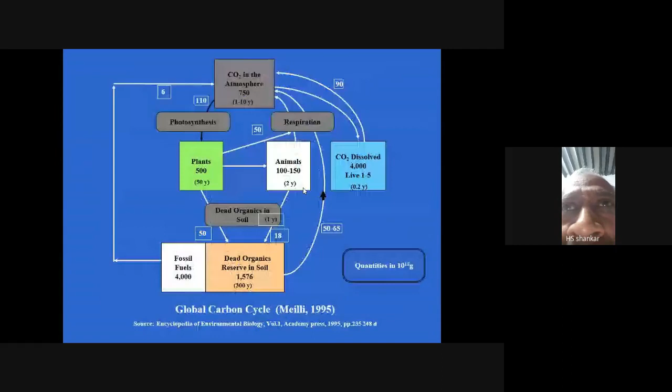So my fundamental submission is that we try and create, through the Jal Nigam funds, pumping of water from Ganga into Varuna and Assi.

Having said this, there are some points the Professor from INTACH has made about a lot of waste being thrown into the river. These are problems of corporation, well taken, and to the extent that we can resolve this by talking with them, whatever arrangements are required are being provided. I think all these are going on. A great amount of work is going on in Varanasi, and the quantity of waste going into these rivers has come down significantly over the years.

I'd like to briefly point out that we have a very interesting natural technology which has been working very well throughout this country. We have done close to about 200 million liters of work in different parts of the country, and many religious shrines like Pandharpur also have our plants working extremely well. What we create is a natural garden using a media which has the capacity to absorb, and the reaction rates required for these reactions to occur.

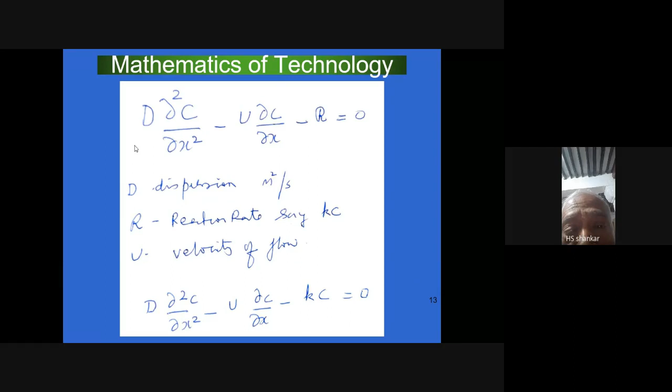Can you show one more picture of this, Vivek? No, backwards. Just backwards, please. Backwards. You showed just now. Yeah, thanks a lot.

What we have in this whole technology, we call it CAMUS SBT. CAMUS means Continuous Multi-Stage Advanced System of Soil Biotechnology. Essentially what we are using here is the biochemistry of soil, appropriately integrated, which we know how to do because we've been doing it for a number of years, where we have a bioreactor into which we put a media.

The media is what we locally use. Most of the time, the media we use in the Ganga Basin is only broken bricks, because it is abundant, easily available, and relatively cheap.

Once you put this material and pump the water suitably, appropriately distributed, for which we have a good distribution design, when the water percolates, the most important point is that the pore space in the media is so large that the redox potential at any point you measure is close to 800 to 900 millivolts, showing that oxygen availability right across the 4 meters of depth is extremely large, and there is no oxygen deficiency at all. That is our experience of many years.

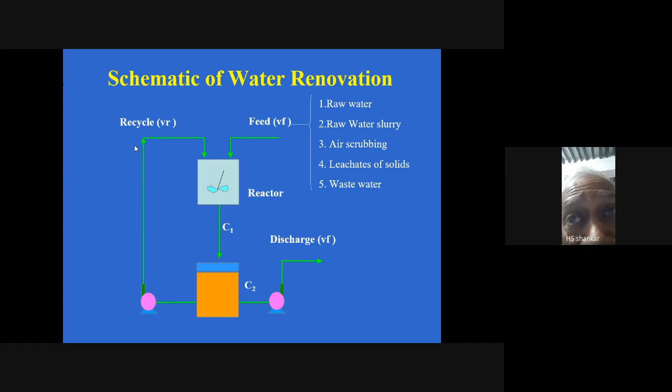Cut the long story short, what I'd like to present to you, sir, is to be able to revive Varuna and Assi. All that we require is to provide about 1,200 crores, for both the rivers, to Jal Nigam and IIT BHU, in association with us, my team, and Jal Nigam. Within 12 months, I promise this revival of both the rivers can be achieved, while we continue to work at the source to improve the water at the river source, about 100 kilometers away, and so on.

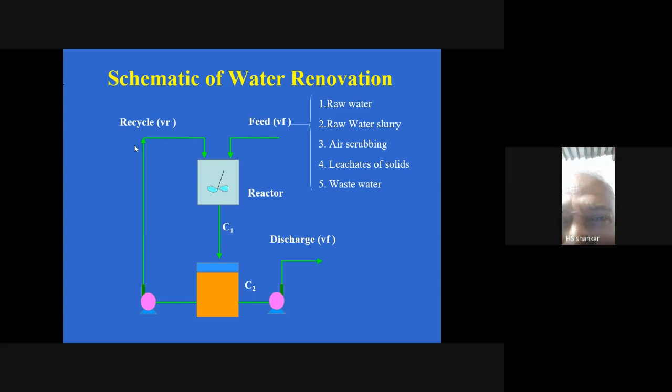This is my humble submission, and I request this house to recommend to the government to provide 1,200 crores to the Jal Nigam, so that this problem of Varuna and Assi can be revived within 12 months, so that the civilization known through Varuna and Assi as the center of civilization can be restored. Thank you very much, sir.

Thank you. So since I am the... Hello? Yes, hello, yes. Thank you, Professor Shankar. I was supposed to introduce Professor Raghava Varma because he is the next speaker. Okay, no problem, and thank you so much for this opportunity.

Thank you very much. So we would now like to listen to Professor Raghava Varma from IIT Bombay on the application of an advanced instrument. So, Professor Varma.

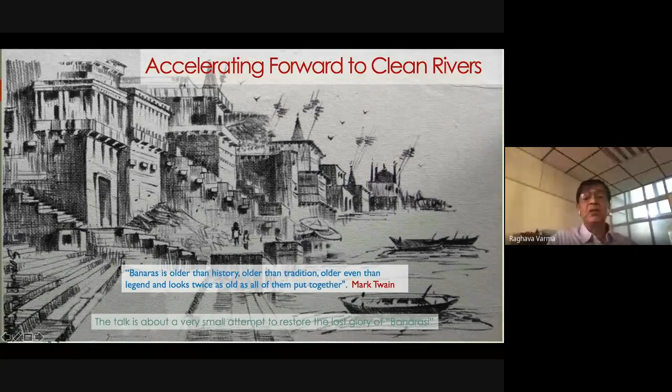Banarasi is the Pali form of Banaras as we now know it. What we are proposing is to develop the first of its kind high intensity superconducting electron accelerator with the help of scientists from Japan, which will fit into the narrow bylanes of Varanasi to transform the landscape. These are various pictures of Assi.

Though I am from IIT Bombay, I am a boy from the banks of the Ganga, so it's in my interest - as Professor Singh said in the opening remarks today, if we don't do it, who will do it?

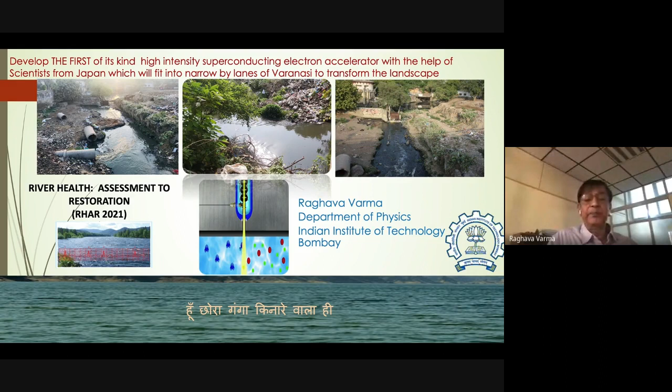Now, pollution in Ganges - as Dr. Bhatnagar also said - there are carcasses, cremation, nalas flowing in, industrial waste, human and cattle excreta, and fecal matter. One thing we have not yet been tackling is the level of arsenic which has seeped into the groundwater in all of the Indo-Gangetic plain. I believe we do have a system which would take care of all this.

This is some data from Varanasi, where the fecal coliform - which should be as low as possible - is 88,000 per 100 ml in Varanasi. It doesn't meet any of the norms set by the NGT.

What we are still unaware of is that the problem exists at a much deeper level - there are contaminants of emerging concern which have found their way even into the purest water in the world, such as in Switzerland or France. These are called contaminants of emerging concern, and we have not bothered to look at it.

They are generated by antibiotics, detergents, metabolites, disinfection byproducts - which are available in plenty right now - explosives, pharmaceuticals, personal care products, solvents, steroids, reproductive compounds, you name it. We have not bothered with this, because if you see the state of the Assi River, these are an order of magnitude less in concentration, yet still very harmful.

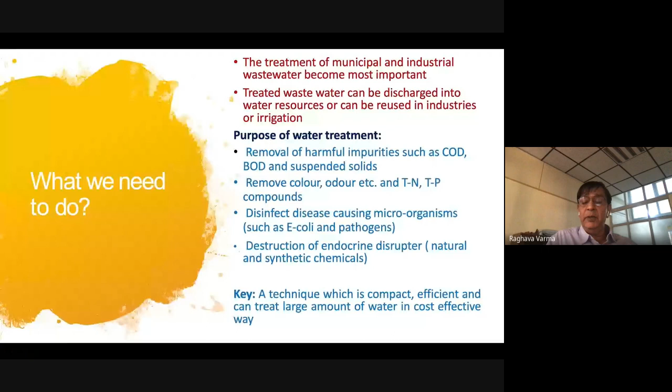Some people have presented three types of advanced treatment processes: advanced oxidation process - I would not go into that - reduction, and then it's like buy one, get one free. If you could have a process which combines both oxidation and reduction, it would be much more efficient.

The process I am trying to use involves ionization radiation, which will produce both oxidation and reduction radicals. You can have radioactive sources, but because they can contaminate, they can be stolen, and they need to be replenished or produced, so they are expensive.

Instead of that, I'm proposing that you irradiate the water with a 1 to 2 MeV electron beam, high intensity. The ionization radiation causes excitation of the water molecule, producing H star and OH star, and ionization knocks off an electron, giving you OH and aqueous electrons. Hydrated electrons, which we call aqua, are a reducing agent. Hydrogen atom, as everyone knows from basic 12th class chemistry, is a reducing agent. Hydroxyl radical is an oxidizing agent, and they join together to produce H2O2, which is again an oxidizing agent. So you have both oxidizing and reducing agents working at the same time to reduce the biodegradable waste.

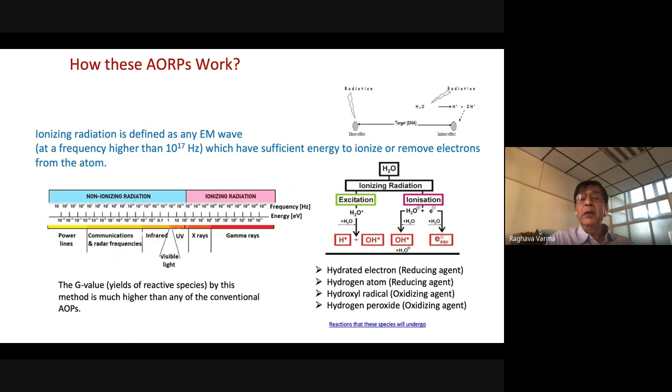In this process, we get the most number of radicals present. You can either have a reducing agent or an oxidizing agent, or you could have both. Nature helps us because the dielectric constant of water is very high, so it prevents the recombination of these ions.

So why an electron beam? I will not go into detail, but it is an eco-friendly technique, with no secondary waste generation, no use of catalysts and heating as bioremediation or other processes require. What we are producing is compact, reliable, energy efficient, and easy to control. It removes the need for chemicals such as chlorine and ozone, which produce carcinogenic compounds as byproducts.

It removes organic impurities through radiation chemical reactions, removes color by destruction of double bonds in azo compounds, and removes odor. I collected some water from Assi very recently, and it was stinking. By opening rings of aromatic compounds, and more than that, it achieves 100% disinfection of microorganisms.

As far as my understanding goes - I'm a new entrant, a trained experimental particle physicist by profession - there is no process capable of killing the E. coli bacteria present in Ganga in huge numbers. You only have UV, which works for a very short time. At IIT Bombay, in our swimming pool, we tried ozonization. It did not work, so we finally had to resort to chlorination, and chlorination, we all know, is carcinogenic.

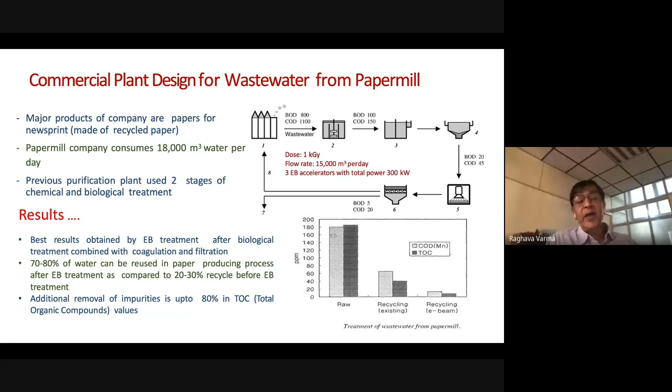This is the construction cost and the additional cost, and we don't require 1,000 crores for treatment. With existing facilities, if one adds an electron beam, the best part is the economics: within 5 years, the waters not only meet the NGT norms, but because of recycling and less use of chemicals, the cost is returned in 5 years.

This is the cost comparison for various activated carbon options. Biochar is one option we could use, which was presented in a talk by Professor RHAR from McGill, I think.

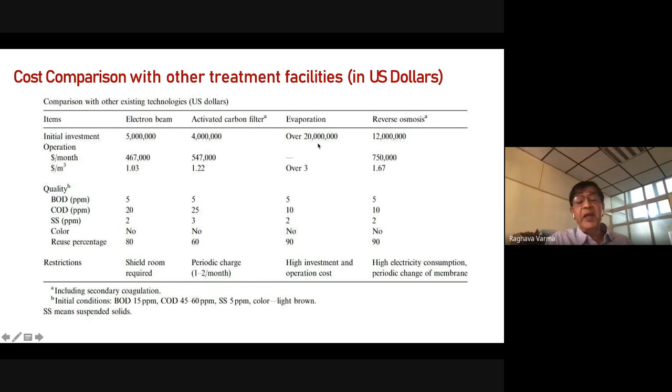To give you a brief idea of how conventional treatment works: you have raw sewage, screens, comminutor, and then the regular aeration tank. This is a normal STP. It requires a lot of space. And if you have coliform, you need a tertiary or advanced treatment plant involving chlorination and ozone.

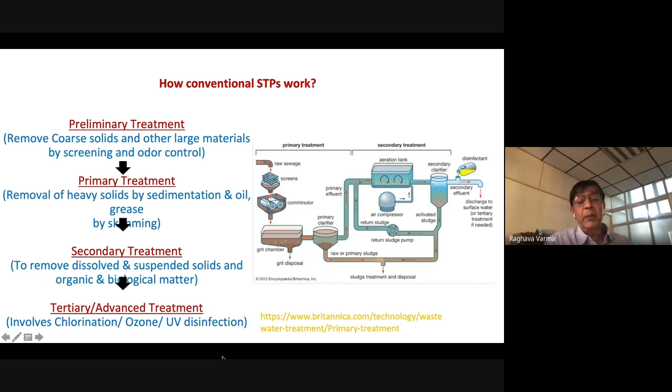My experience with the swimming pool at IIT Bombay - it didn't work, we had to resort to chlorination to keep our pool clean. UV disinfection, again, is very expensive and very bulky.

What we are proposing is an accelerator of this kind. This has already been designed at IIT Bombay on the computer, and you replace all this conventional setup. This is just 3 meters in length, and as Professor RHAR was presenting, you add another 1 meter for biochar, and then pass the water through.

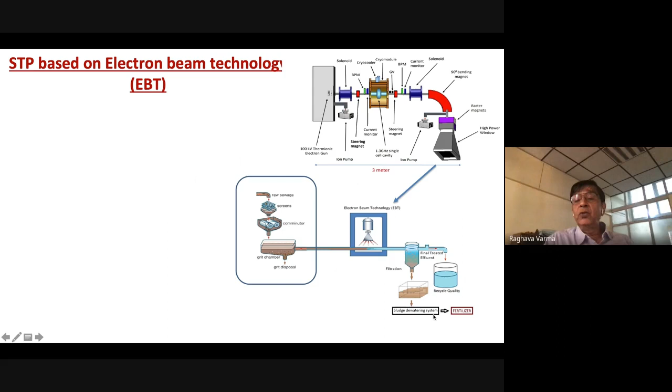Even the sludge can be used - there is no sludge left now. This sludge can be used as fertilizer, and it removes TOC. Everything - the tertiary treatment - is done by EBT. You filter it out and you have recycled water, which is as good as even for drinking.

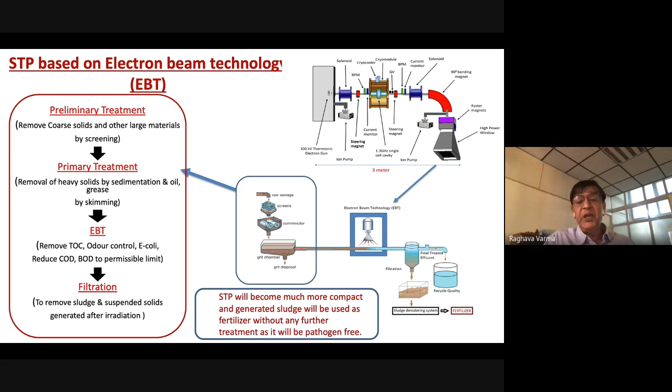So the STP will become much more compact. You can fit it in the space available at Assi, just before it meets the Ganga ji at Assi Ghat.

These are the various parts that we have designed - I will not go into detail, this is a talk in itself - but the whole length is just 3 meters. So in a space of about 8 meter cube, we can accommodate the whole plant, which would be as good as this.

We did some experiments because normally when you present this, people ask, has this been done? We did this experiment with a medical linac available at SAMEER, housed in our campus at IIT Bombay. These are some radiation calculations done by one of the students to effectively irradiate the sample. Because it's a pencil beam from a medical linac, we had to optimize our geometry, but our proposed system will be much larger in power.

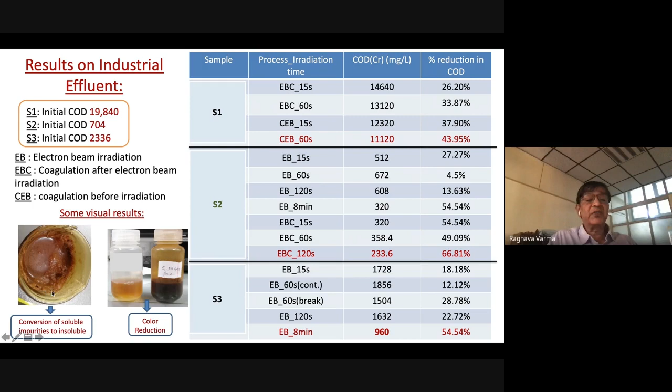It is about 40 kilowatt with a larger beam scan area, so we should get better results. Even with this smaller setup, we took the worst effluents possible, from pharmaceuticals, and the percentage reduction was as high as 66%. You can see decoloration also, and some waste was left behind, which we have not missed.

So we are not reinventing the wheel, but there is something new. These are various systems available or operational in various parts of the world. What is new in our system is that we use a superconducting machine, which is very efficient - the wall to beam power ratio is very high, 80% or so.

So less power cost, less operational cost, and the operational cost - I was hearing the talks this morning - we will meet the requirement and be as competitive as any other system presented today or yesterday.

So what has been done about this? This work is part of a project submitted by Government of India on our behalf to Government of Japan, under the Science and Technology Research Partnership for Sustainable Development - called the SATREPS scheme. It took me 2 Skype meetings to convince the Japanese scientists that this project is doable, our country wants it, and it could be a game changer, not only for India, but for the world, because of CECs.

CECs are present even in Switzerland and France, where they have the cleanest water in the world. Under this scheme, the scientists in Japan have submitted a similar proposal to Japan Science and Technology. This would now be evaluated by JST, and if approved, it would be fully funded by Government of Japan.

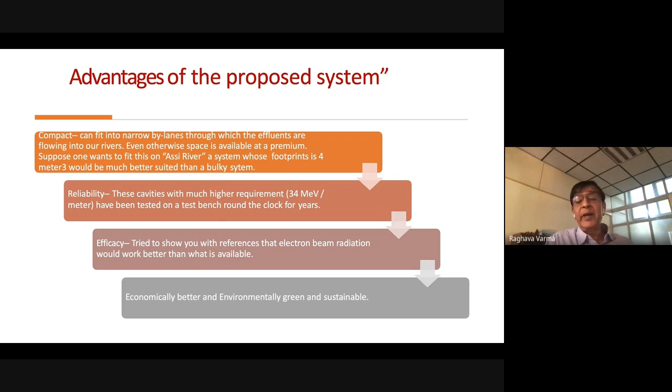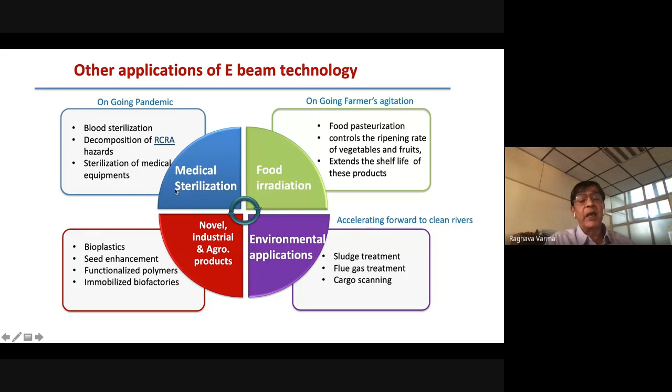Thank you very much for your patience and listening to me.

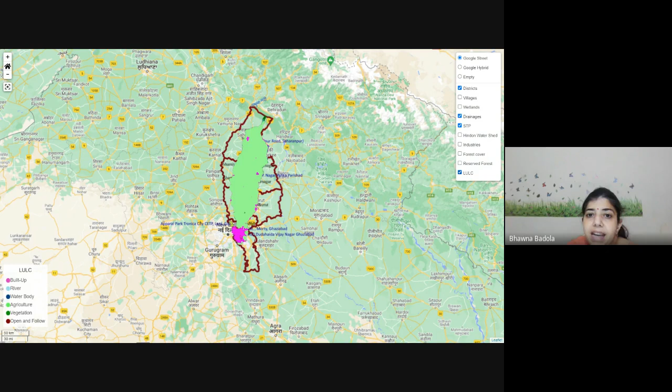And this land use land cover actually shows you the exact thing. Almost the entire Hindon Basin is very, very dominated by agriculture, and this also shows the challenge that the river is currently facing.

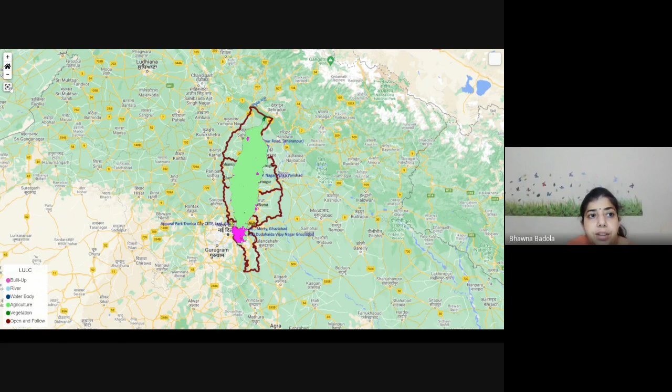Now we have divided the entire dashboard into 2 parts. One is the category where we have some general information, and the second category is pollution, where we have pollution-specific data sets. In the district view, there is another classification: one where the entire Hindon Basin data sets are shown, so currently what you're seeing is for the entire Hindon Basin. But if somebody wants to go for each district, they can also see what are the district-specific issues and challenges being faced in the river basin.

In the land use land cover, we see 76% of the area is agriculture. And if you look at the type of agriculture and the crops grown, you will see that 33% of the total agriculture area is cropped with wheat, sugarcane, and other fodder crops plus rice. So these are the four major crops grown in the basin, and these are all very water-intensive crops if you have a look. And please remember, in the beginning, we showed how the groundwater levels are dropping.

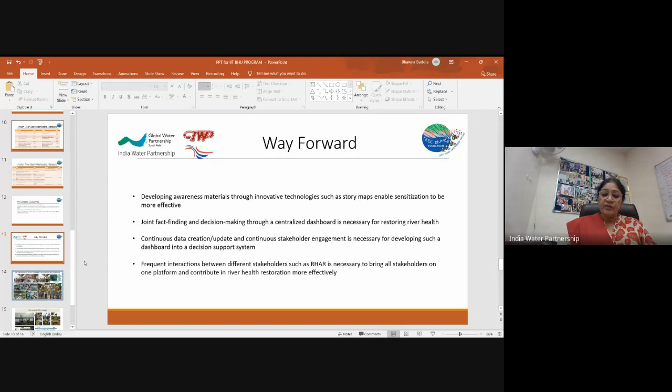So through this platform, we really required the kind of feedback which Bhawna has presented, and this is from our side. Thank you so much. Thank you for giving the opportunity.

Thank you, Dr. Veena, Dr. Bhawna, for a very elaborative presentation, and that too focused on River Hindon. So I hope this dashboard will be really useful in regenerating the rivers, especially Hindon, and we can have similar models for other rivers as well.

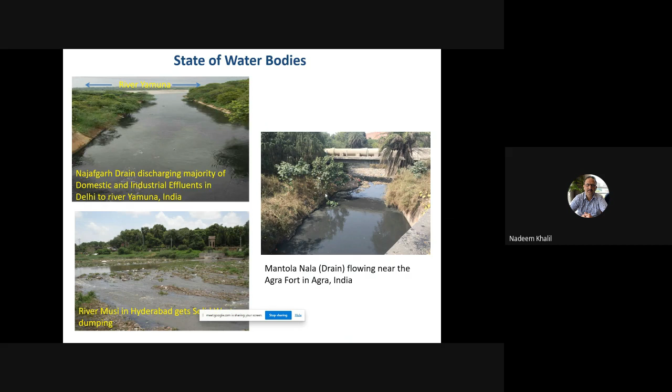So I hope everybody is aware, and we know the state of water bodies in India, especially River Ganges, River Yamuna, Hindon, and all of its tributaries, including some of the rivers in South India.

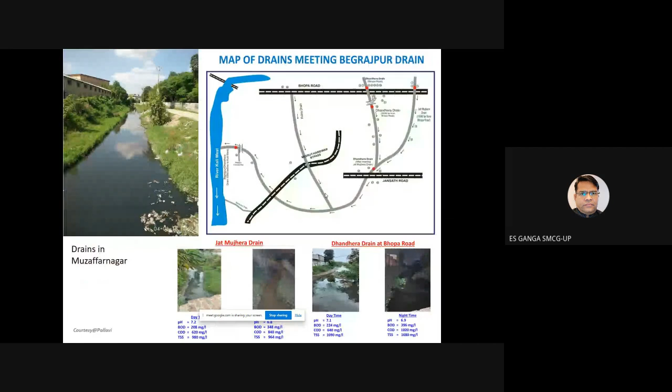Please don't speak when the speaker is speaking. You can chat, we'll send it on WhatsApp, no issue.

May I continue, or you want to? No, please continue.

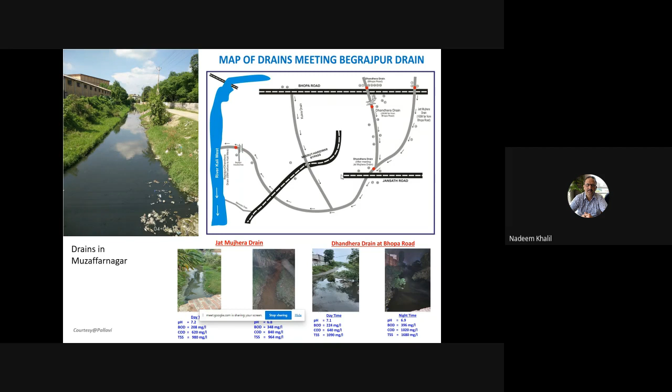So Dr. Veena Khanduri has been associated for a long time with River Hindan, and these are some of the pictures we got when I was working with the WRG 2030 for River Hindan restoration. It's a sorry state of the water bodies, especially rivers in northern India, because all of these drains, nalas are flowing into the rivers. Untreated wastewater is finding its way into the rivers, making it dirty and contaminated. We have already tried many options like Namami Gange. The efforts of Namami Gange are greatly acknowledged, but still we don't have any foolproof solution, and we don't see any visible improvement in the quality of our rivers and small tributaries.

Now I shall be presenting this as case study 1, which has been the basis for development of a new method derived based on the R&D we undertook in collaboration with European partners under the FP7 framework program, supported by the Government of India through the Department of Science and Technology. It was a coordinated call where we had participated, Dr. Veena and Professor Singh, and maybe Dr. Manu Bhatnagar might be aware of this project, SWINGS - Safeguarding Water Resources in India with Green and Sustainable Technologies. It was a consortium project with about 20 partners, 10 from Europe and 10 from India.

It was a very diversified composition - we had academic institutions, research centers, leading research centers from Europe and India. AMU took the lead from the Indian side, whereas the AIMEN Research Center in Vigo, Spain, took the lead from the European side. The overall objective of the SWINGS project was to develop and deploy optimized sustainable solutions for wastewater management, especially domestic wastewater, in order to make full use of water resources for different purposes like irrigation, cleaning, public and private demands, and aquaculture farming, with a focus on very low energy demand for rural areas, towns, communities, and arid regions in India and the region.

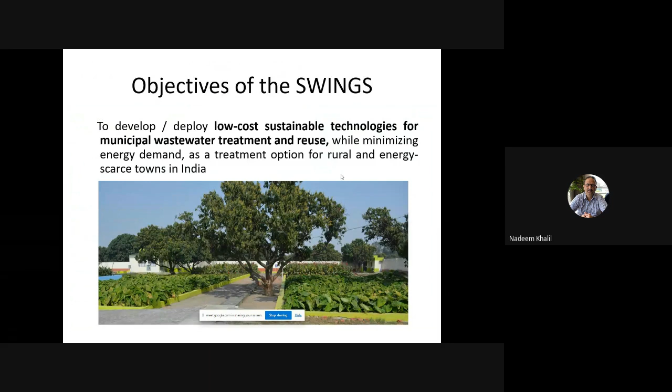As far as the location of the piloting that we did under SWINGS, there were 3 sites: one at Aligarh Muslim University, Aligarh, then Kalyani University in Kalyani, West Bengal, and the third site was in Amarkantak at the Indira Gandhi National Tribal University. So in the AMU site we had 3 pilots, whereas in Amarkantak we had 1 pilot plant, and in Kalyani we had 2 pilot plants.

The domain of the technology implemented throughout the SWINGS project was the development or deployment of a very innovative or novel concept of constructed wetlands. It is basically a phytoremediation technique. We have already talked about phytoremediation and other similar nature-based solutions yesterday and today. So it's not that we are reinventing the wheel, it is proven technology.

If you see the history of India, this technology or concept has already been experimented and implemented maybe 1,000 years before. But what the Europeans and other developed countries have done with this technology is give it a very scientific shape and engineered way of doing things - that is their expertise and their input. But as far as implementation of this technology is concerned, it is already there in palaces, in many forts in Rajasthan and in Gujarat.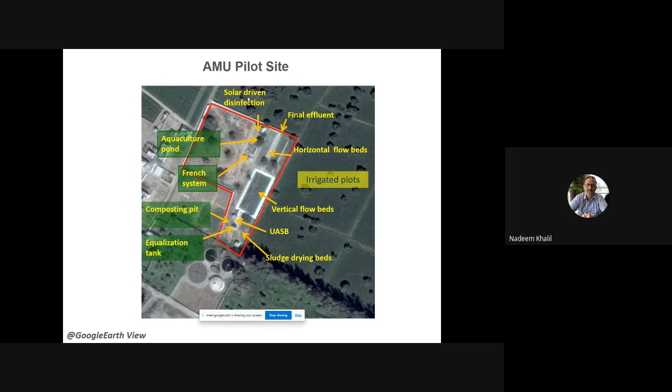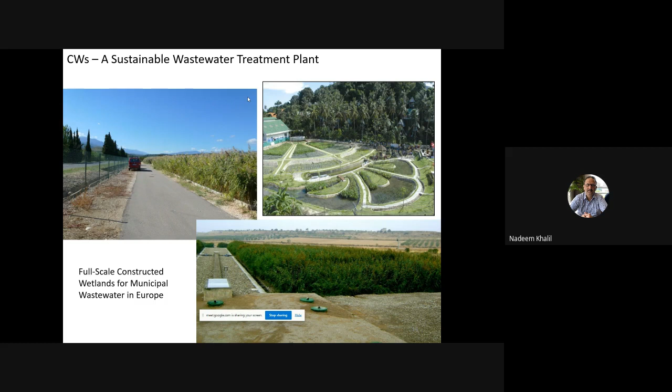This picture shows one of the pilot sites from our partners based in Germany, Leipzig, at the Helmholtz Center for Environmental Research. This is the pilot plant located in one of the villages on the outskirts of Leipzig. You can see the quality of the raw sewage on my right hand, and the treated effluent coming out. Similarly, we have this other vertical flow constructed wetland in southern Spain that I got a chance to visit.

Now this is the treatment scheme of the AMU pilot plant. The entire sewage of AMU campus comes to the existing STP owned and operated by AMU, which is based on trickling filter technology. We have tapped a stream of raw sewage from that STP and brought it into this tank - this is the collection tank, just a holding tank, not part of the treatment process.

From here it is lifted to the first step of treatment, the anaerobic digester, based on the principles of anaerobic process - it's a UASB technology widely implemented in India. After this first stage, the wastewater goes into the next stage, vertical flow constructed wetlands, followed by horizontal flow constructed wetlands. Finally we do disinfection through solar-driven methods - one is anodic oxidation process, and just to make a comparison since this was an R&D project, we also installed a UV radiation method.

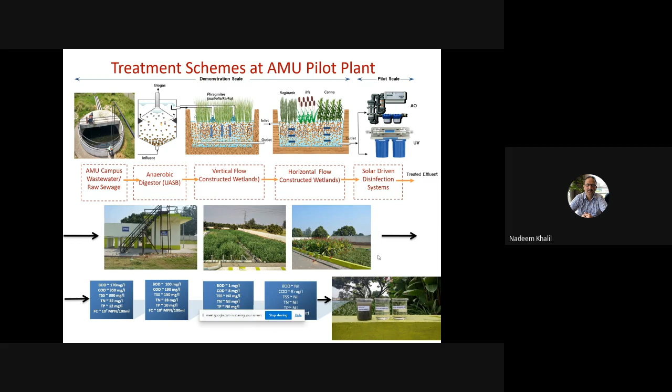Another configuration of the wetland system, very common in Europe especially in Germany and France, is the French type of wetland system. The beauty of this type is that it doesn't require any pre-treatment like in the earlier configuration, where you need some primary treatment like anaerobic digestion or primary sedimentation.

In the French type system, no primary treatment is required. This basically requires less footprint as compared to the conventional wetlands.

This is the first stage of the French type of system, followed by the conventional horizontal flow system, so that the treated water is free from all pollutants and is taken to the aquaculture pond where we are doing fish rearing. This is the quality of the effluent coming out of the horizontal flow wetlands.

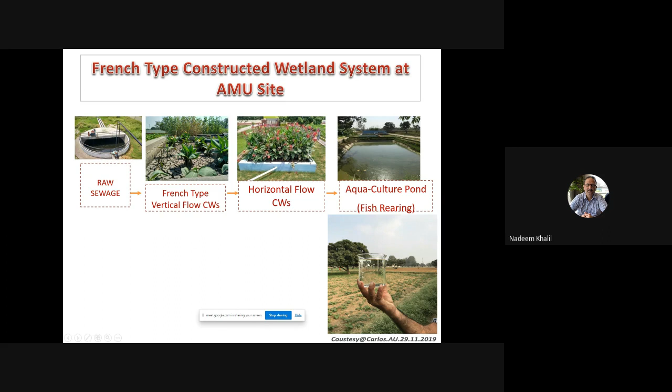This picture was taken by one of our partners recently, Dr. Carlos from Aarhus University, Denmark. This is the actual view of the vertical flow wetlands at AMU.

You can see the vegetation is basically Phragmites karka and Phragmites australis. Harvesting is done every 2-3 months because these are emergent plants, macrophytes, that can grow up to 2-3 meters. So you have to harvest this vegetation at that interval, and this harvested biomass can be used by farmers for their homes, for making roofs of their huts, and other purposes.

Now these are the pictures of the solar-driven disinfection method. This is the anodic oxidation process, a machine we got from one of our partners from Germany, Otterkorn. In this anodic oxidation process, the chloride present in the sewage, the NaCl salt, is converted into chlorine gas, and that chlorine gas helps in disinfecting the wastewater.

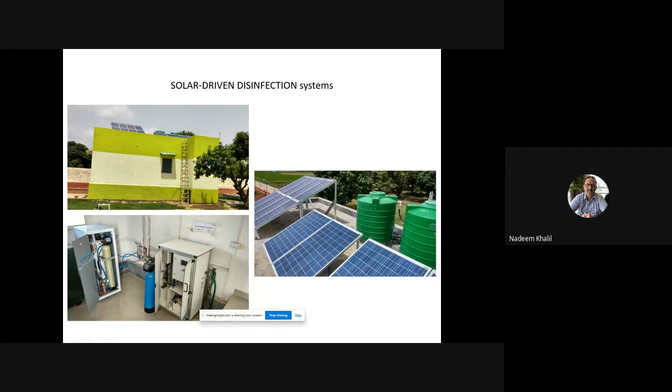It is a fully automated and SCADA-based system. It produces chlorine as per the demand, as per the level of coliforms in the sewage.

These are the graphs which I will skip.

This is the animated view of the STP that we used to provide: the main collection sump, followed by the inlet chamber, screens and biodigester, then vertical flow and horizontal flow, and finally the chlorine contact tank and treated water. At all of these places, the treated effluent is being used for gardening, horticulture, or fish rearing.

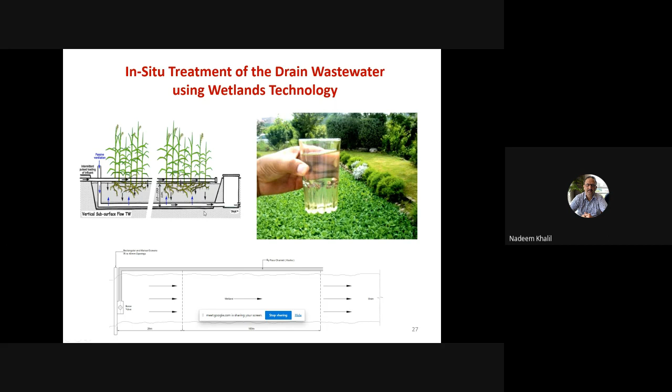With this concept in mind, we thought to develop wetlands technology for on-site, in situ treatment of the drain water. We developed this concept and it has been applied for patent. We have already done 6 nalas in Bithur near Kanpur, and we are doing one big nala in Agra near Taj Mahal, that is the East Gate drain, a 2 MLD capacity drain flowing just on the side of the Taj Mahal.

This picture shows Bithur, where we have already implemented this technology in six nalas. Otherwise it was flowing out into the river Ganga. This is one of the nalas in Bithur, showing the situation before implementing wetlands.

This was the construction stage, and finally this is the wetland system that we installed. This is the actual view of the wetland system.

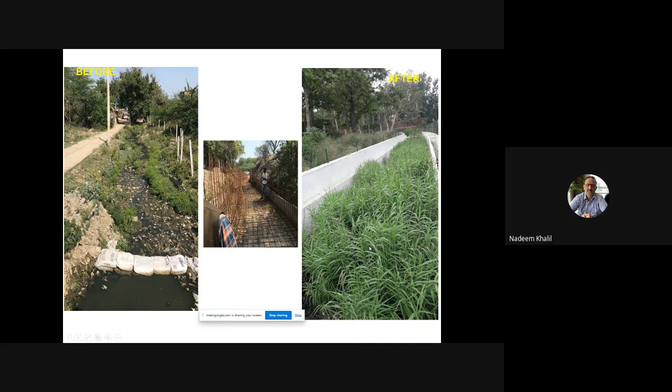You can see the quality: this is the raw sewage, which is very diluted in most nalas in India, this is the middle stage treatment, and this is the final effluent. BOD is less than 10, COD is less than 30, and TSS is less than 20. Finally, we do disinfection with the help of chlorination, which is the conventional process of disinfection in India.

This is project Pavitra. We are experimenting and piloting at 14 locations in India. This is much bigger than project Swings, and it comes under the Horizon 2020 framework program. From the Indian side, it is again supported by the DST. This is the new project we have started, and we already had a consortium meeting in Aligarh, where you can see one of the directors, Dr. Mathuria, who visited the Swings project when we had a meeting in Aligarh in 2019.

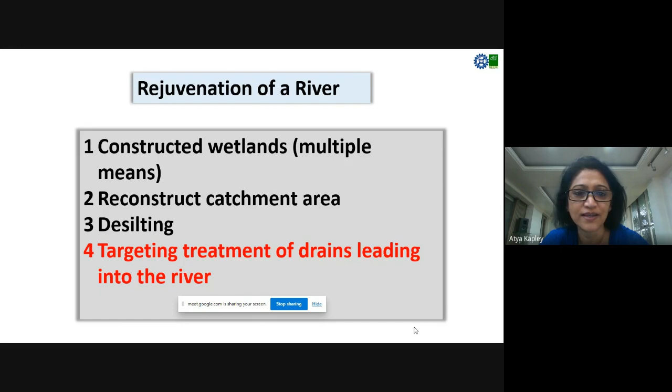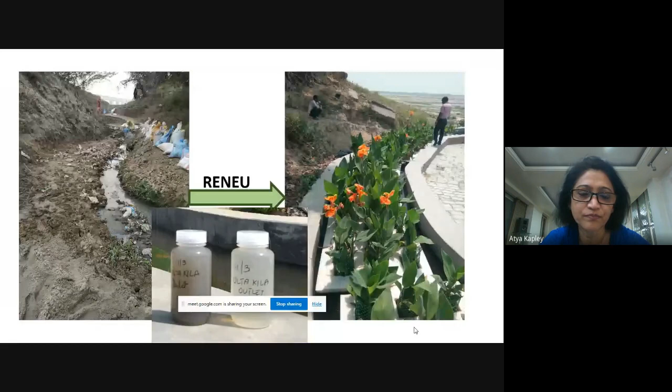So NEERI has developed this technology called RENEU. You can see on the left hand side we have the Kacha Nala, and we have converted that into this panel that you can see here. It's not only about the aesthetics, but you can see from the picture that the water quality also shows a lot of improvement.

Basically, our treatment is a decentralized treatment option, as is quite evident, and all our treatment happens within the drain itself. We utilize all the components of an STP, like sedimentation, primary treatment, and aeration, incorporating these components within a flowing drain. The flowing drain does not only contain wastewater; everywhere across India, there's also the problem of solid waste being dumped in. So we convert these drains into a Paka drain, having different components or units within the flowing drain, without taking up any extra space outside the natural path of the drain.

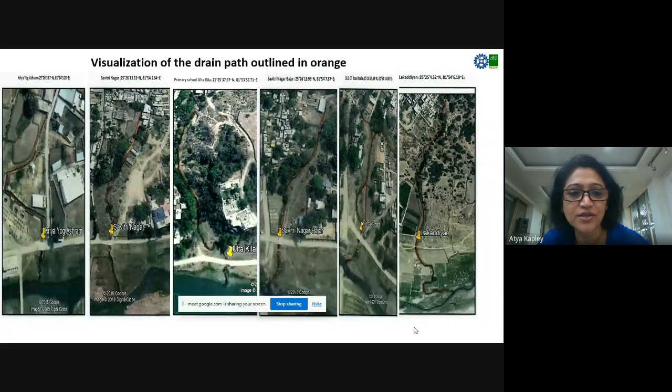These are the locations at Prayagraj. These are the drains that we took up, you can see the red arrows indicating where the drains were, which you saw in those Google images. All of them join a main drain and lead directly into the Sangam point, which is where the holy dip happens and one of the most important pilgrim bathing sites.

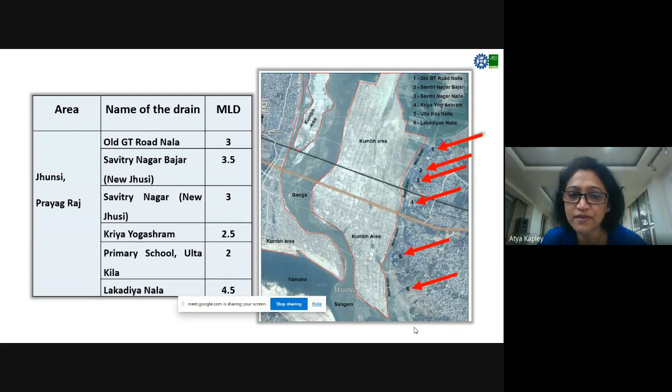So treatment of these drains is extremely essential, because otherwise all the devotees are getting exposed to sewage that is coming directly from these drains.

Our treatment incorporates screens that take care of the floating garbage, a sedimentation tank incorporated into the drain, biomats, and aeration chambers. I'll show you some pictures of those. At the end are the flow rafts, which are floating rafts on which we put wetland plants to take up the excess nutrients.

I'm the biologist of the group, and we have engineers too. The team that tackled these projects contained a biologist, that's me, a chemist, and engineers including a civil engineer and a chemical engineer. Basically, a topo survey was initially done to understand the lay of the path, and whether we need to change elevation and things like that.

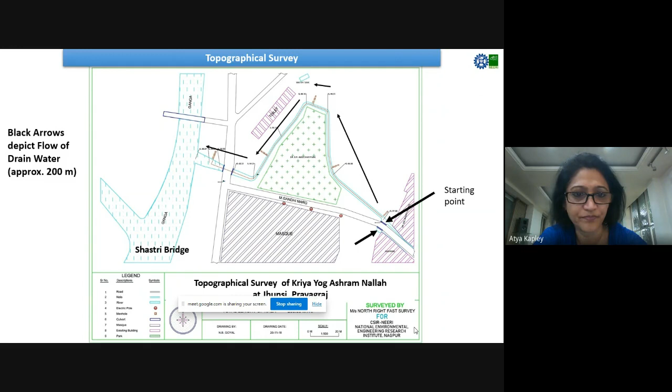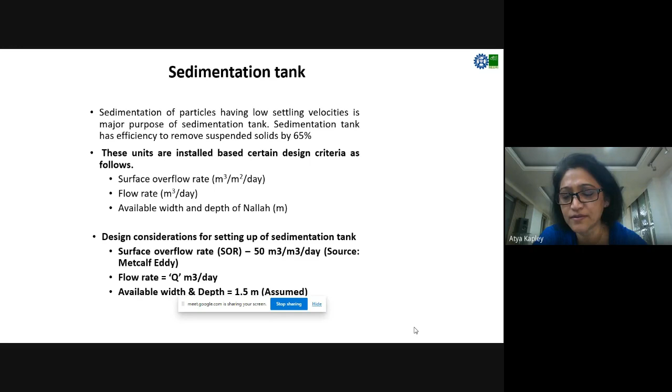The length of the sedimentation tank is calculated based on so many parameters, basically on the load and the length available for treatment.

We use biomats in which we immobilize our bacterial consortia. Since this is all sewage, we have bacteria that have proteolytic, lipolytic, and amylolytic activity, which are immobilized. We have tested this with different immobilizing agents before we incorporate them into the biomats.

Aeration is a little difficult, because this is a decentralized treatment option, and many times there is no scope of getting electricity. So we have incorporated solar panels that are placed across the drain, connected to a compressor and a battery, of course. So there is constant aeration being supplied into the drain for the aerobic biodegradation process.

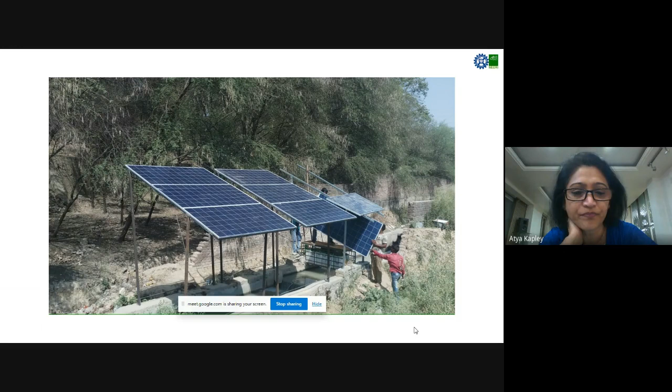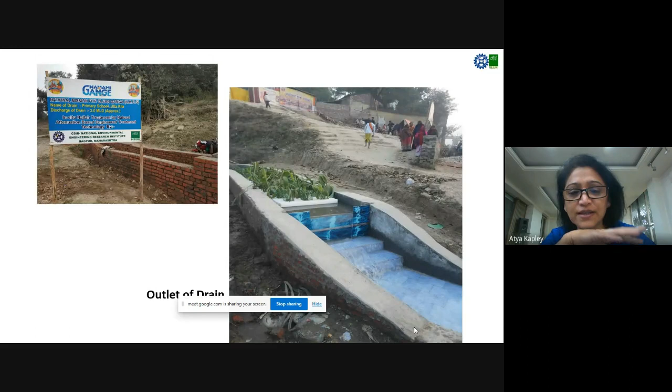So these are some pictures. This was done by the Namami Gange project at the time of the Kumbh Mela, when the National Mission for Clean Ganga was looking after treating all the drains. So NEERI was given 6 drains. On the right, you can see the difference in the water color as it comes out, at the last gate before it joins the river. These are also some more pictures, so you can see.

I'm really very proud to share that the drain treatments were so appreciated. We even had the Honorable Minister Shri Nitin Gadkari ji put up pictures of these during the Kumbh Mela on his Twitter handle.

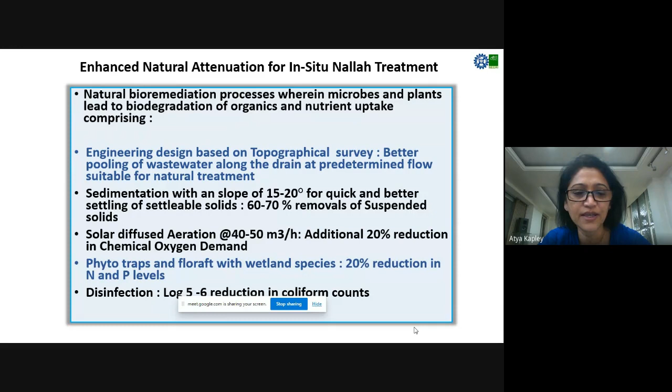We have monitored the efficiency of all the different units of our treatment structure. We have a number of units within different gates along the drain. The only problem that we face is the fecal coliform. So most of these places, the monitoring of performance was given to a third party. It was done in this case by CSIR IITR, and we have seen very good results of reduction of BOD and TSS and everything.

The system itself has a lot of advantages. Main is that it does not require any extra additional space, and it can treat the water as the drain flows. Since we build retaining walls, if you have sudden shock loads, the system can take care of it. During the Kumbh, the actual drain flow was 3 or 4 MLD, but during the Kumbh it went up to 10 and 12 MLD.

So our system was still able to take in this kind of shock load. It's very low on maintenance, it does not require very skilled labor, mainly only desludging at the sedimentation tank and maintaining the plants. It also gives you a very good aesthetic appearance, because now you have converted that drain water which was flowing into a beautiful looking area with plants and flowering. You use canna, very nice flowering plants. So there are a number of advantages.

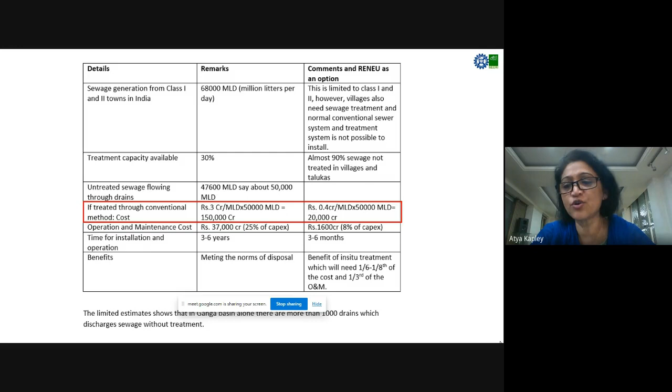It's also very cost effective. We did a comparative statement, comparing it with a conventional STP, and you can see highlighted in red, if you hypothesize for all the wastewater generated in class 1 and class 2 towns, this comes out to be much more cost effective than the normal STP. So we always propose decentralized treatment options in India. And it's not only about creating the STP, you need to change the entire sewerage system, which is a different cost not included in this calculation.

So this can be done at any of the drains. If we look at the river Varuna, there are about 17 drains, of which 11 are untapped, and this kind of system can easily be put up in all of these. So you are already treating the water entering the river before you make any other arrangement, and this would be an immediate arrangement that could drastically halt the pollution going into the river.

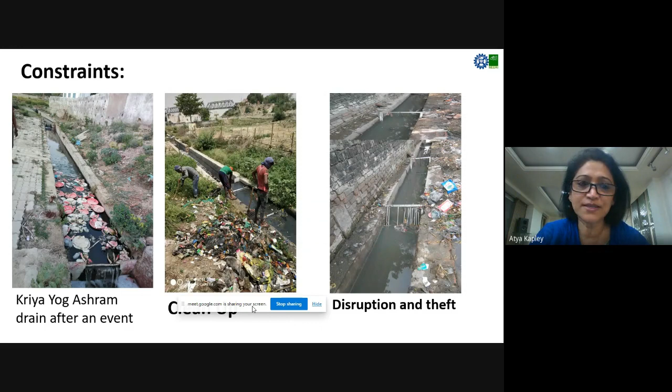It's not that this is free from any constraints, but the main constraint is people's perception. You can see from this figure that this is supposed to be a wastewater drain treatment, but the wall you see in the first panel is the wall of an ashram. You can imagine that in Prayagraj, with so many different ashrams, when they have a festival or an event, all the patals are dumped into the drain. It is just a matter of creating responsibility.

All this is solid waste and it should actually be dumped in a separate place. They could have just collected all the solid waste and put it on a different site, but it doesn't happen. So every other time we need to hire labor to dig this all out of the drains, so obviously your treatment efficiency gets hampered. Then there is a problem of theft, because these are in open grounds.

You can see that most of the screens we have put up, all the rods have just been taken. So there are these kinds of constraints, and the only way to deal with them is to get the people involved.

The awareness and responsibility sharing of the citizens who live in and around your treatment process is one factor that is, I would say, mostly neglected. All of us, the scientists, CPCB, the Pollution Control Board, everybody, we are just so focused on the technology and implementation methodology that we forget the main thing, creating awareness. That's not yet actually being addressed. Without people's participation, whatever treatment system you set up is going to end up like this.

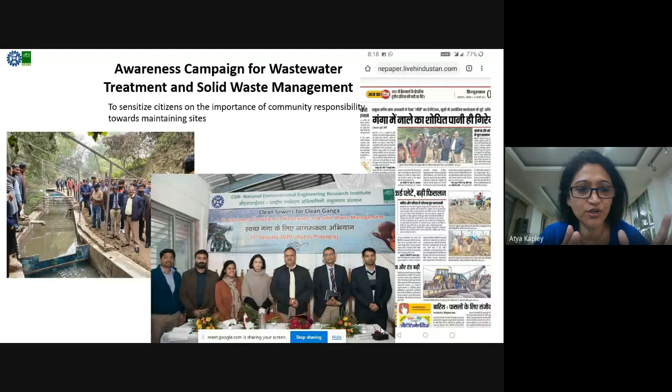I'm not really sure now how much they are still participating in this, but I feel these kinds of awareness camps are extremely important even before we start the projects, so that the people living in and around the places we are trying to treat are able to join in and take responsibility of at least keeping your treatment intact.

Here I'm going to throw some light on Assi River restoration using reclaimed water from the nearby STPs. Firstly, River Assi is said to have been a major river for Varanasi city, so much so that the city derived its name from the two rivers Varuna and Assi. However, the once 120-kilometer long river Assi has reduced into a mere nala of 3.5-kilometer length due to various anthropogenic interferences such as urbanization, industrialization, and land encroachment.

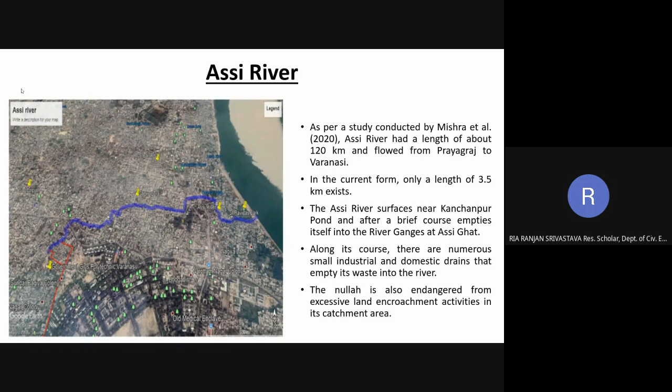The current origin of river Assi, as shown in the map, is said to be from a pond called Kanchanpur, whose source is wastewater generated from the nearby area. If proper interventions are not made, this river with such historical relevance will become extinct. This river, which does not have a perennial source, will eventually dry out if not augmented. The confluence of River Assi and River Ganga is shown in this image.

It can be seen that immediate quality improvement by dilution of the wastewater stream from Assi does not take place, and hence wastewater flows along the ghat for a while, making the water extremely unhygienic for humans as well as affecting aquatic life.

Till now, most STP installations in India were focused on safe discharge into the river system. However, we need to become the buyers of reclaimed water and start utilizing wastewater as a new potential source of water. We need proper visualization and defined targets for achieving an efficient water-sufficient system by closing the human water cycle loop. In this work, we suggest appropriate technologies for wastewater treatment plants and different routes through which River Assi could be augmented from nearby STPs, providing continuous, cleaner support to this river system.

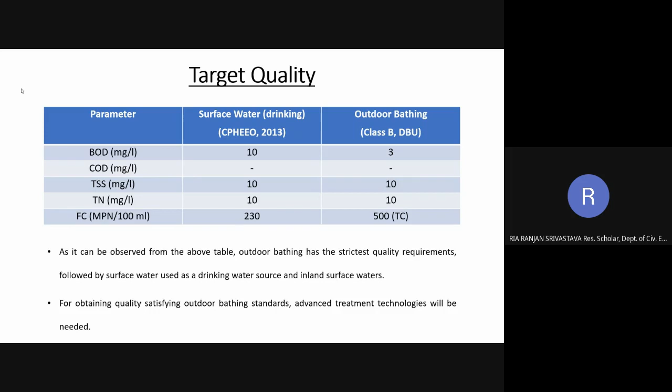The target quality of the effluent produced from these STPs is taken as that for discharge into surface waters used as a source of drinking water, as defined in the CPHEEO 2013 manual, and outdoor bathing as defined under Class B category designated best uses.

For SBR-based Ramna STP, supplementation with Wuhrmann process, which is a post-denitrification process, is suggested. It will lead to reduction in the fertilizing nutrients present in the river. Although effluent from Ramna STP itself will not be sufficient for overall improvement of the Assi River.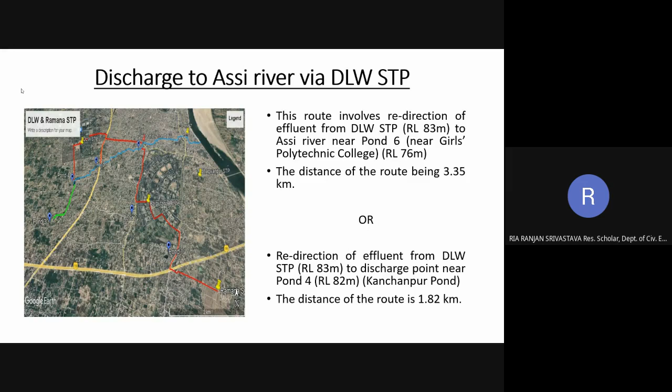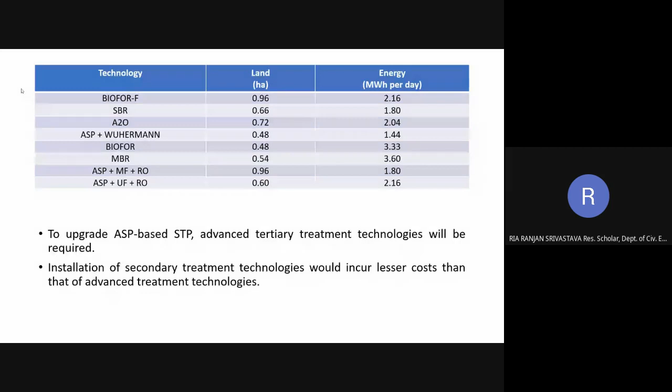The fourth route is DLW to discharge point near Pond 6, near Girls Polytechnic College. This route suggests gravitational flow of effluents from DLW STP to the discharge point near Pond 6 due to the elevation difference. The effluent from DLW STP needs quality improvement, so technology upgradation or supplementation of this ASP-based STP is suggested. Due to high costs, installation of new secondary treatment technologies along with ASP technologies is suggested in place of augmentation with advanced treatment processes such as ultrafiltration, microfiltration, and reverse osmosis.

Since the source of river Assi in its current form is wastewater generated from the nearby area, mixing very high quality effluent from one STP cannot serve the purpose of quality improvement completely. Hence, a combination of the suggested routes will perform better work for achieving the target of Assi River restoration.

Here, there are two routes being shown: from DLW STP to Kanchanpur Pond, marked as Pond 4, and from Ramna STP to Assi River via BHU campus. This route will provide continuous flow support at the mouth of River Assi near Kanchanpur Pond. The mixed effluent from here, while following the natural course of the river, will be further joined by effluents from Ramna STP and BHU STP. Addition of this second source of treated effluent to the mixed effluent flowing in the river will further replenish the self-purification capacity of the river by boosting the kinetics of microbial degradation.

Ria, kindly wind up. Yes sir, quickly, yes sir.

So the last combination is from DLW STP to discharge point near Girls Polytechnic College, and Ramna STP to Assi River via BHU campus. This effluent release is more or less at the same discharge point.

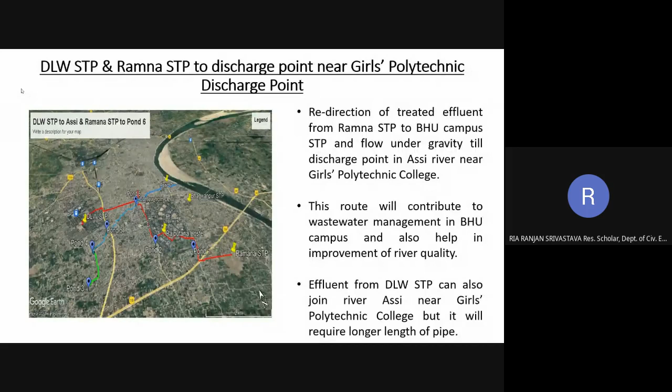I'd like to conclude that all these implementations need to be done keeping in mind the capacity of the river, the target quality, the influent wastewater characteristics, aquatic life in the river, and the economic and other constraints. Most of all, it should ascertain safety for human use. In-channel treatment of the river near the end or along the course, and of connected ponds, is suggested, which can very efficiently contribute to further improvement in the Assi River revival. Also, I feel a combination of ideas presented here, such as biochar filtration, enzyme application, and phytoremediation, with proper implementation, can contribute immensely to our target of river Assi restoration.

We do require flow support for river Assi, otherwise the river Assi will dry out. Thank you.

So I'll hand it over to Professor P.K. Singh if he has any suggestions to make. No, thanks, let's stop here. We are running short of time. Professor Nadeem, what is our position? Only one speaker is left. And in the second theme we have 5 speakers, but I have doubt whether we could comply with the time. So I don't know, it's basically... actually, in fact, let me clarify.

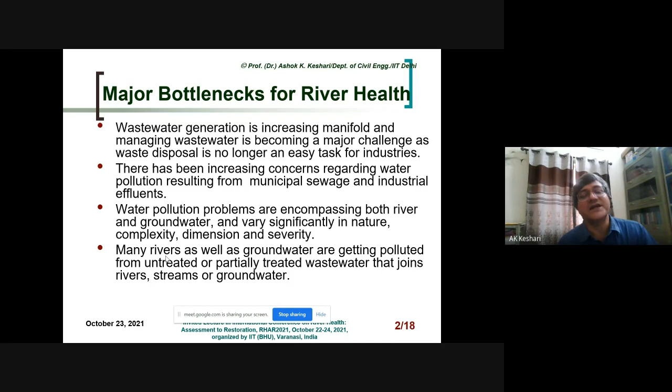And of course, that also goes to the groundwater, because there is a dynamic situation of connectivity between the rivers and the groundwater through the stream-aquifer interaction.

So when we talk about river health and water quality, and try to simulate it, as you've already heard from many learned speakers, every river or stream has an inherent capacity to assimilate the pollution load. This depends basically on the reaeration capacity, or how the self-purification is going to happen. So the primary process involved in handling the problem is certainly treatment - you treat the water and only then release it to the river.

But you also need to know the flow condition in the river, whether it is very low, high, or fluctuating very high, because the reaeration processes are governed by many processes.

The physical processes you see here are something like self-purification, dilution or adsorption, which control and are responsible for giving the reaeration capacity.

The chemical processes certainly need the oxidation-reduction process - we had a lecture by esteemed colleagues on this. The biological process is how the nutrient interaction happens with nutrients or algae production, or even the interaction between the sediment present in the river and the pollutant or contaminant.

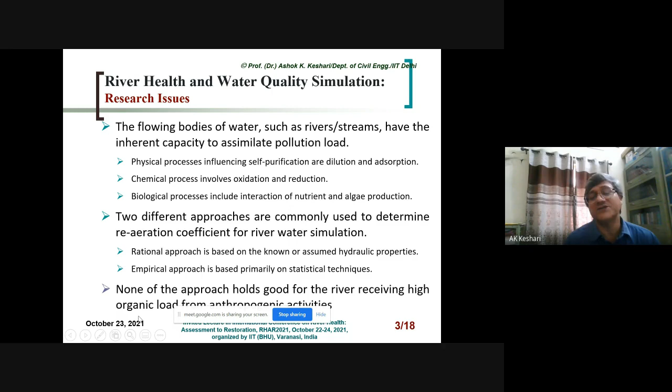What we see is that none of the approaches, whether rational or empirical, show good results, especially for rivers which receive high organic load from anthropogenic activities. And that is what happened in the Varuna and Assi.

So most of the time you'll observe a high amount of untreated or partially treated wastewater joining the river system, and that becomes a challenging problem.

If you look at River Yamuna - since I'm sitting in Delhi, we have done a lot of work with reference to the River Yamuna - I'm showing you the Yamunotri, where the river originates, and then the stretch in Delhi, how it looks like.

If you look at the figure on the right-hand side, you can always say, without doing any scientific analysis, that the river is in bad shape. And that raises the question of whether the river is still living or dying. Although we now recognize the river as an ecological entity, think about what kind of situation we actually have.

So if the river is already in a dying stage, how is it going to assimilate the impurities, and how is it going to provide self-purification on its own?

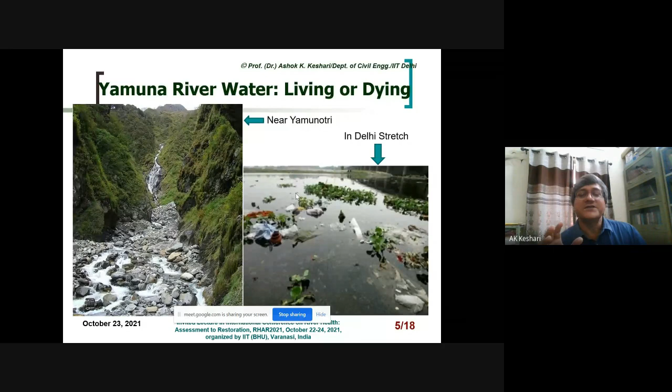That certainly demands greater concern, or a greater integrated effort for handling this kind of problem.

See the quality here. This shows the BOD level for a typical situation, and this point is indicating the Wazirabad barrage location. If you go downstream of Wazirabad in the River Yamuna in the Delhi stretch, up to around 10 kilometers downstream, you see a high BOD level, more or less around 40 milligrams per liter.

And the DO level, if you see after Wazirabad, it is almost 0. So is this an aerobic condition? Can you call this an aerobic condition, or has it already gone into anaerobic condition? That is the question. And if that is the situation, how are you going to define, mathematically or scientifically, what could be the reaeration capacity, how it is going to digest any kind of pollutant load in the river system? If it changes throughout the season, sometimes aerobic, sometimes anaerobic, how are you going to handle this kind of situation?

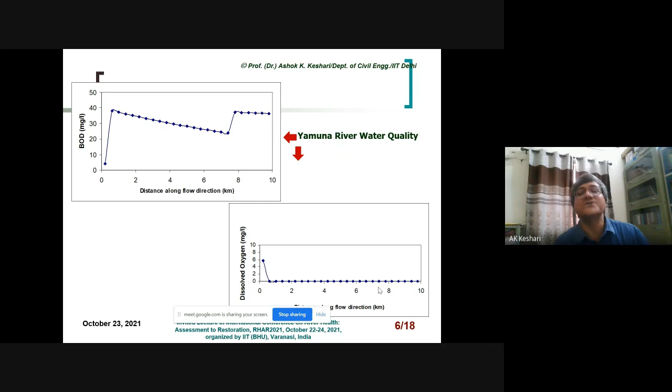If you talk about the River Varuna, we already had a lot of information on the River Assi. But the River Varuna is also characterized by a different kind of system, like very low flow during the non-monsoon time.

And when it travels during the river course or through these drains, a lot of water percolates down also. So during its course, it is going to contaminate the groundwater as well.

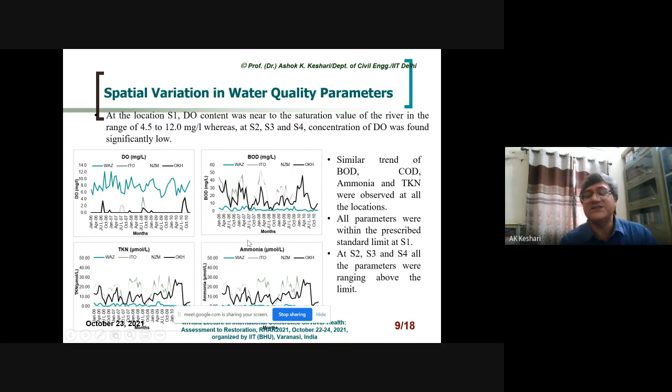We looked at total Kjeldahl nitrogen and ammonia, and tried to identify which stretches could be grouped or clustered based on statistical analysis. We did cluster analysis and identified the first group, which is more or less a living river system.

That means the DO is still more than 5 milligrams per liter. We get a cluster of this kind, where TKN, DO, ammonia and BOD form a cluster, and similarly different clusters are formed elsewhere.

Professor, please summarize a little early. Yes, sure, I'll take a couple more minutes, that's all.

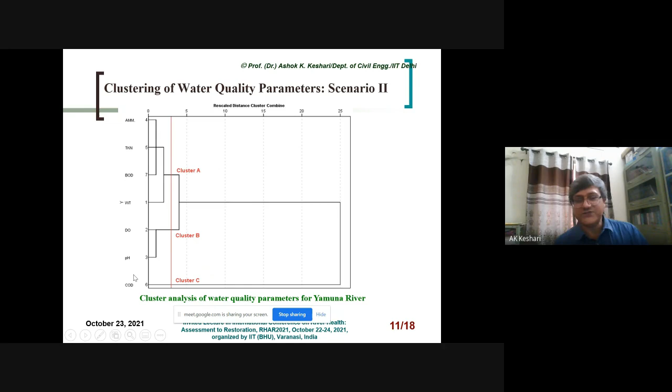So clustering of the polluted stretches shows how groupings are done for ammonia, nitrogen, BOD, water temperature, DO, pH, and COD. Based on this clustering, we identify which parameters are dominant and should be taken into the re-aeration analysis or used in developing a re-aeration model for a degraded river.

So this gave us the thought that we should have a new model, and we tried to develop a model based on the neural network and fuzzy inference. This is how we have gone for different configurations of the ANFIS models.

And then we observe this: the ANFIS 8, 6, and 10, or ANFIS 6 and 8, are giving the best results for the re-aeration.

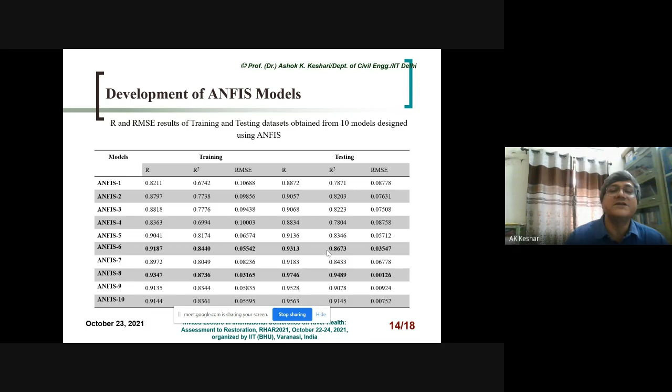So why am I talking about scientifically modeling the re-aeration? Because whatever technology or process we implement, this helps us understand really how well that system is performing.

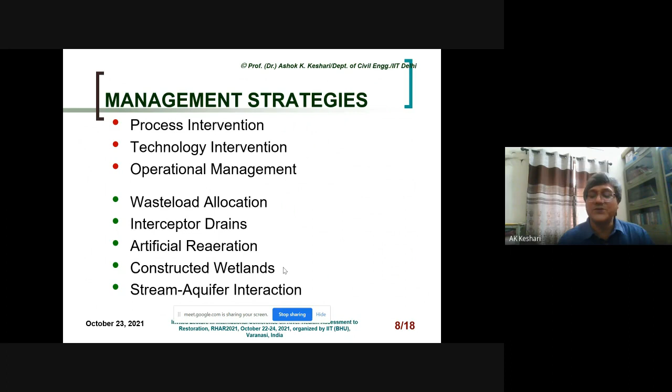So in a nutshell, when you put in a system of different complementary technologies, involving process intervention, technology intervention, or operational intervention, you need to see what the re-aeration of those rivers was before and after the project, and you can evaluate it in degraded or healthy rivers by making use of the right models for this.

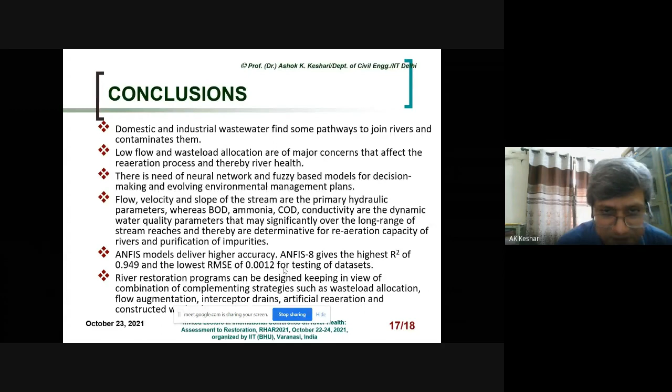So with this, I would like to conclude that domestic and industrial wastewater find pathways to join rivers and contaminate them. That is what we see in Varuna and Assi also. There is low flow, especially in the non-monsoon time. The low flow and the waste load allocation are of major concern.

And another thing here is the highly fluctuating flow—sometimes very low in monsoon, very low in non-monsoon, and very high in monsoon. This affects the re-aeration process and certainly the river, and thereby river health.

We need to have emerging or innovative models for evolving management plans for such rivers to rejuvenate them, so that you are able to scientifically assess the re-aeration for degraded rivers and re-aeration for healthy rivers.

We need to see that flow velocity and slope of the stream are the primary hydraulic parameters that govern the process, whereas BOD, ammonia, COD, and conductivity are dynamic water quality parameters that affect the processes in the long run. That is where you need to see how these contaminants have to be removed, and as we have seen, the ANFIS model of this kind works well.

So river restoration programs can be designed keeping in view a combination of complementing strategies: waste load allocation, flow augmentation, interceptor drains, artificial re-aeration which becomes important here, and of course constructed wetlands, as I have told you we have recently constructed on the Noida main drain, which is expected to perform very well.